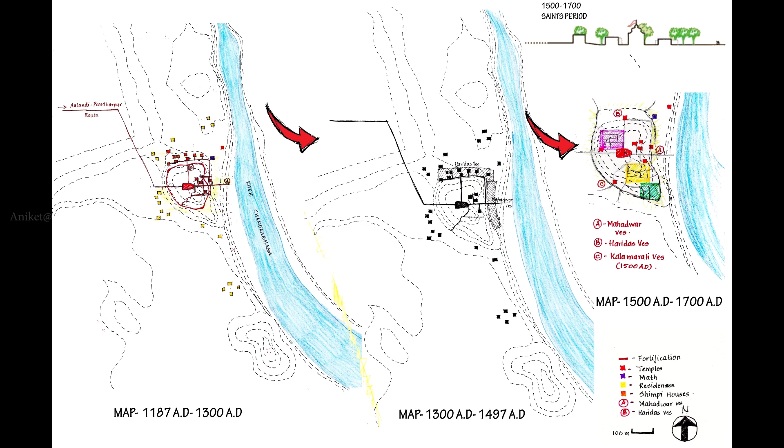Pandharpur and Vitthal existed in myths. Earliest mention of Pandharpur is found in Skanda Purana and Padma Purana. Skanda Purana are the verses and dialogue between Lord Shiva and Parvati, whereas Padma Purana mentions the story of Pundalik, who was responsible for getting Vitthal in Pandharpur. From many literature sources referred, it is evident that Vitthal temple existed in the 6th century, according to Purana.

This town was also called Dindirvana or Lohodanda Kshetra. On further exploration of maps from the 12th century and actually visiting Pandharpur to experience the ambience, it led to the conclusion that the occupation of Pandharpur is temple based.

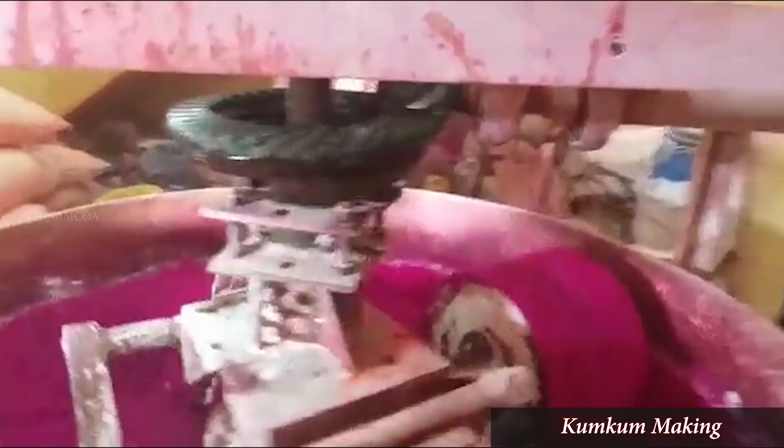Many important occupations have started growing around the vicinity of the temple, where activities like stonecraft, making items needed for puja, bangle making, and many more gave names to the lanes according to the occupation it consists, for example Murtikar Lane, Bhande Galli, Kasar Galli, etc.

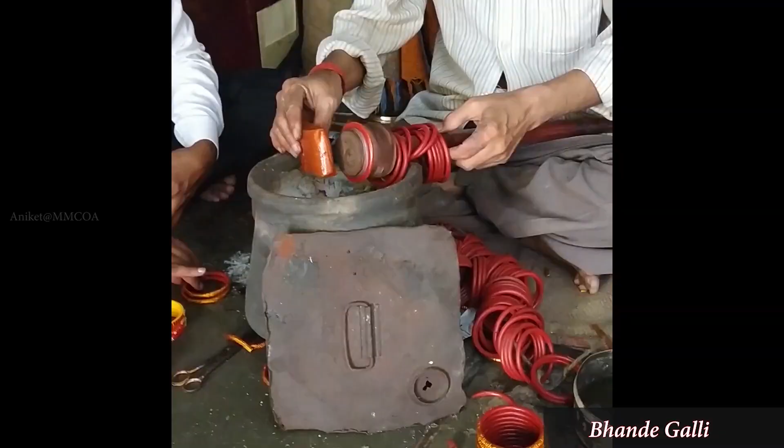Pandharpur was also studied by taking into consideration other pilgrimage places of India like Varanasi and Brajabhumi. This study led to the conclusion that the arts and crafts of Varanasi and Braj still exist in the minds of people, and these cities are studied by many different authors, whereas the study regarding the arts and craft of Pandharpur is still missing in terms of an architect's point of view and further development.

Pandharpur is also famous for its Guru Shishya tradition of the Warkari sect. In the 13th century and even after that, people generally visited this town to meet various santas, seek their blessings, and learn the importance of Vitthal Bhakti. This tradition stopped after the era of the santas.

To conserve such diminishing traditions like the hidden material skills, performing various art forms found in Wari, and understanding mythology becomes the main USP of this project, as these three factors are never pursued by people and many are unaware of them, as their journey is limited to visiting the Vitthal temple.

Hence, the proposal of a Traditional Skill Development Institute, which will practice the Gurukul system of education, seems important to conserve the tradition. As concluded from the study of religious towns of Varanasi and Brajabhumi, many small and large-scale Gurukuls are established in such places which teach the young generation the importance of Vedas. Such enhancement of traditional activities makes the religious town sustained.

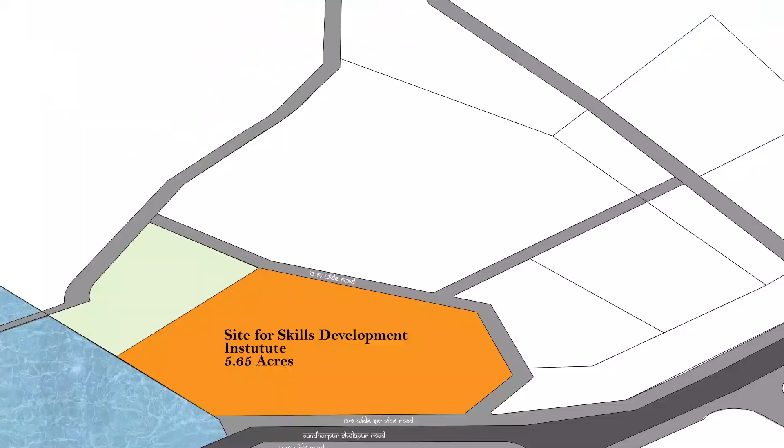Both secondary and primary case studies, as well as the town study of Pandharpur, helped me arrive at my design program and the proposal of a Traditional Skill Development Institute, which will mainly concentrate on teaching various traditional material skills, various Warkari performing art forms, and experiencing the mythology of Pandharpur town.

The selected site for the project demonstration lies within the municipal boundary of Pandharpur town. The site is under the Pandharpur Nagar Parishad, which is purposely reserved for activities related to Warkari and for Warkari education. The location of the site is exactly on the opposite side of the river bank from the Vitthal Rukmini temple, at a 20-minute walking distance from the temple. So as we see from the map, this is the location of the site.

The area of this entire land is 65 acres and it is sandwiched by two bridges: the old bridge and the new Chandrabhaga bridge, which further connects to the Pandharpur-Solapur highway. The growth of this entire town is mainly enhanced because of the Vitthal temple, highlighted on this map. The entire development of the town is towards the Alandi-Pandharpur road and the Pandharpur-Solapur highway, hence there is huge scope of development on this 65 acres of land.

The 65 acres of land is well connected by different historic ghats of Pandharpur on the opposite bank of the river, for example the Krishnaji Ghat, Uddhava Ghat, Haridas Ghat, Kumbhar Ghat and Mahadwar Ghat. The site has direct access from the Mahadwar Ghat, highlighted by this pathway, which further connects to a pedestrian road and hits the site at this point.

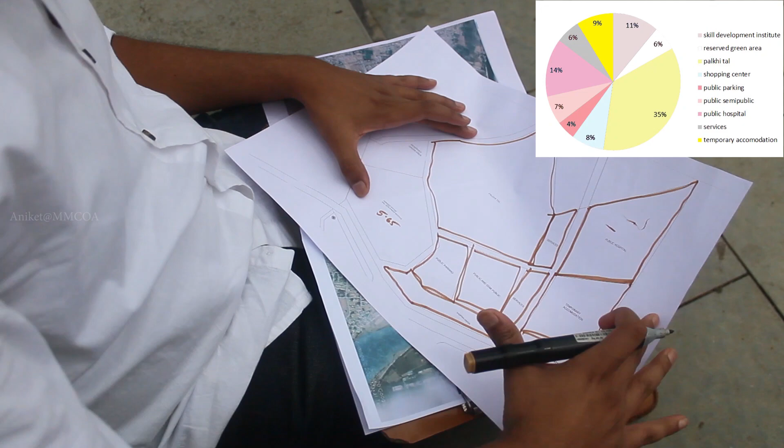I have chosen 5.65 acres out of the 65 acres of land for my development, and the area adjoining to the site is generally covered by lots of vegetation, so this is reserved as a green area. Some part of the site will be reserved for the ghat area, which will avoid the flooding of river Chandrabhaga during the rainy season.

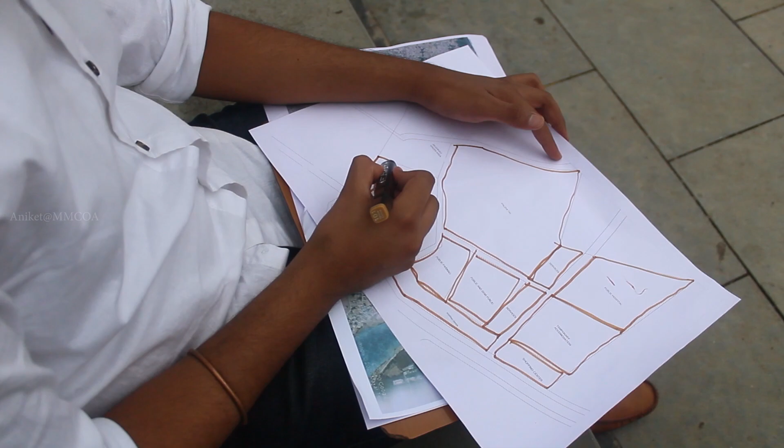To begin with the actual proposal, the essential requirements for this institute are the workshop areas, a performing art classroom for Warkari students, a vocational block which will consist of teaching and learning of various musical instruments found in Wari, a temple area which should be accessible to all visitors, an administration block, a common gathering space, residences for students and gurus, a goshala for cows, and an auditorium.

After trying out many different possibilities of zoning, I finally arrived at my zoning strategy. The placement of the temple and the administration block is planned, as these two spaces are the start and end point for any visitors. Hence, in order to express gratitude towards the old town and the historic temples around, a reference line is traced from the Pundalik temple.

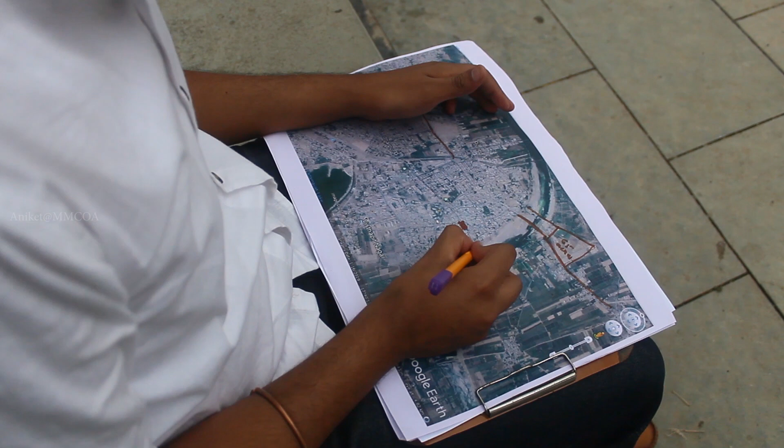This is the location of the Pundalik temple on the Google image. I have traced a reference line, or we can call it a view line, from the Pundalik temple, which hits the site at these two points.

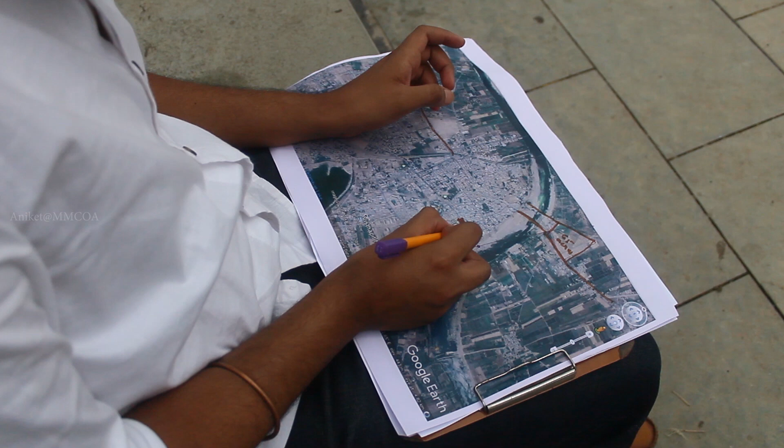As referred from many sources, it is also evident that the Vitthal temple existed on a hillock. This slope is evident as we walk from the Vitthal temple towards the Mahadwar Ghat, which further approaches the Pundalik temple and various samadhis of the Sants located on the riverbed. If I cut the section from the existing Vitthal temple to the Mahadwar Ghat, we can observe the slope towards the Pundalik temple. According to many different sources referred, the level of the feet of the Vitthal idol matches the level of the Shikhara of the Pundalik temple.

Hence, I have traced the reference line from this Pundalik temple towards our site. This is the reference line which I have traced from the Pundalik temple. The newly designed structure on this site will originate according to this reference line and the point of intersection of this line with another reference line.

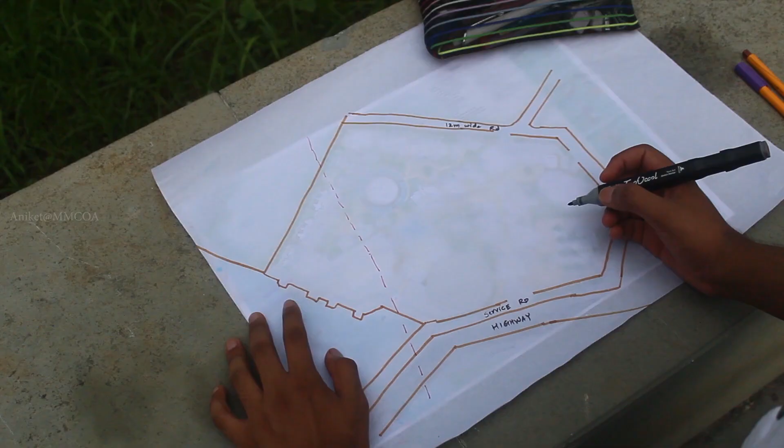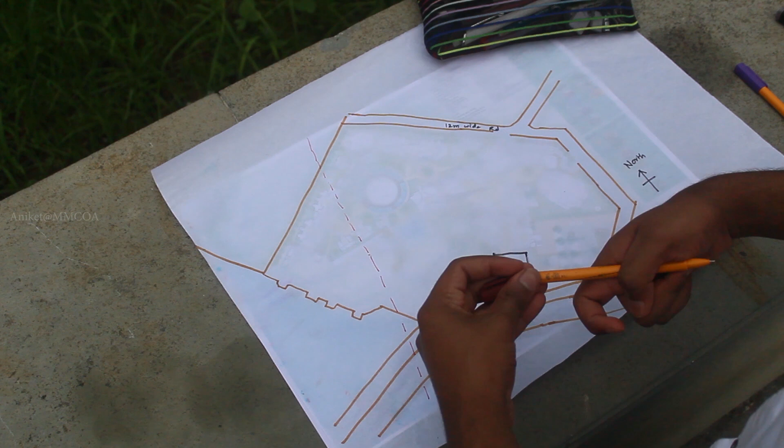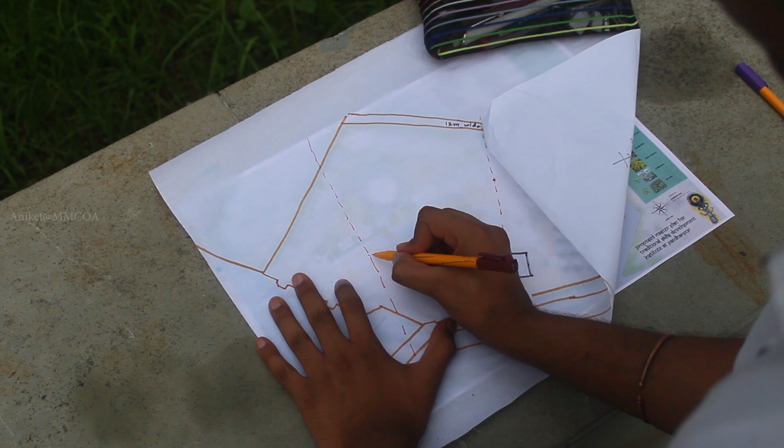To trace another reference point, the admin block is zoned at the entrance, and I have taken the admin block exactly parallel to this service road. So this admin block is generally zoned at the entrance. As I have mentioned earlier, the campus should support the mythology of Pandharpur. Now, when I trace a reference line from the center of the admin block and extend this line from this point, I get the exact location of the temple.

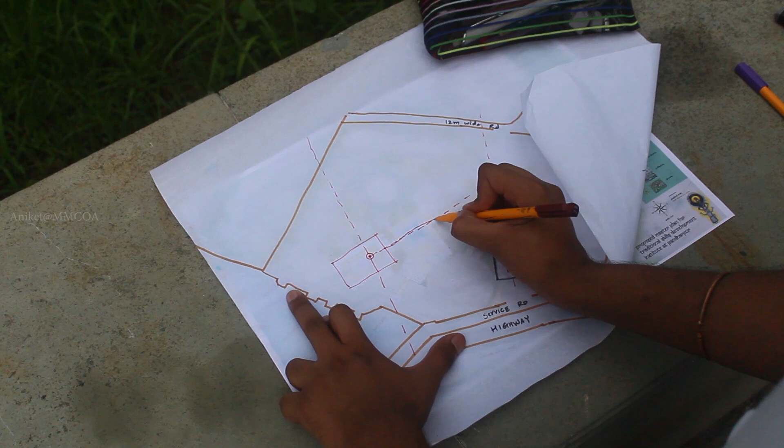Thus, I fix the placement of the temple block and the administration block with a small courtyard, and the remaining building blocks will be zoned along this pathway, which will form an interesting connecting spine to all the different building blocks.

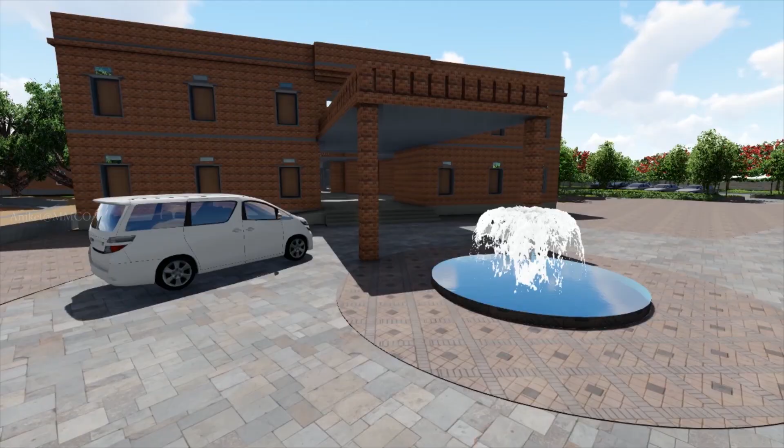The myth of Jai and Vijay, who are painted on almost every house in Pandharpur, are the guardians of Lord Vitthal. It is believed that Vitthal stays in the house where Jai Vijay are painted. The strange thing about these characters is that they are also painted on the walls of the mosque, indicating the importance of these two characters. This quality of guardian is brought into the campus within the admin block by creating a restricted entry for people.

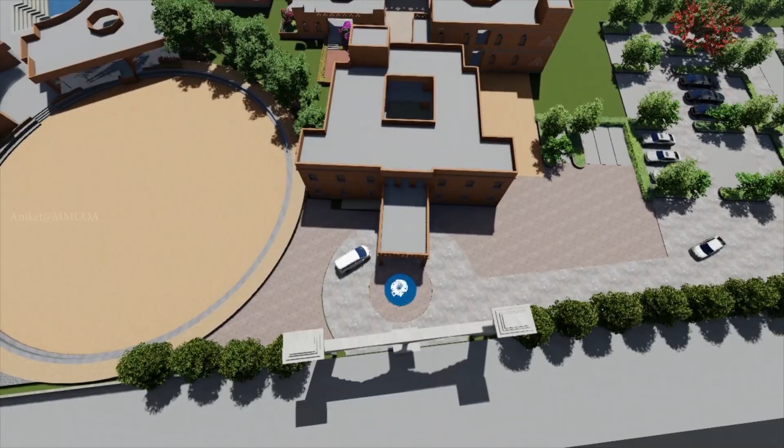This restriction is mainly brought about by the Tourist Information Center and the workshop enrollment space within the building. I have provided 10% of parking space for visitors inside this campus as well as for teachers. During the peak period, the parking requirement will be fulfilled as I have provided 2.3 acres of parking in my master layout. This is the parking space allocated for the teachers and the visitors.

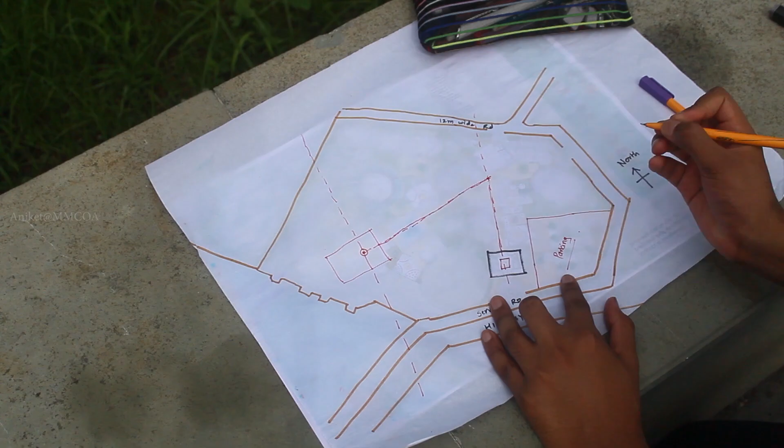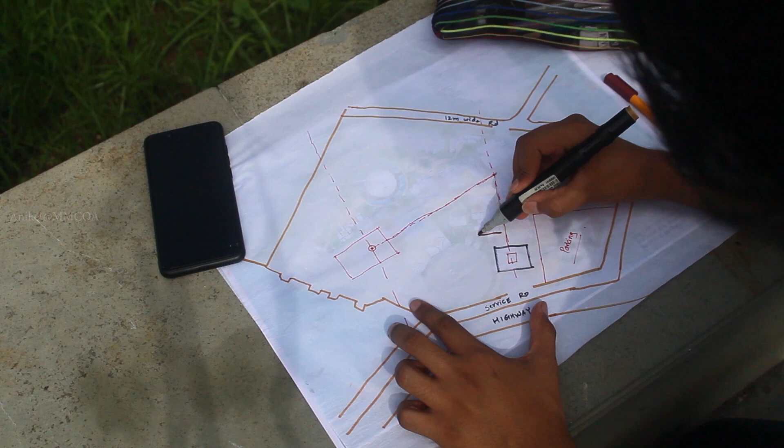Taking a cue from the old streets of Pandharpur, linear low-rise workshop spaces are designed on the site, creating an organic layout of built form and landscape spaces. This creates individual space within each part of the layout. The workshop spaces and the display areas are zoned along this reference line and are basically designed according to the function.

The position of the teacher, so this circle will be the space requirement needed for the teacher to work, and the position of students observing a teacher doing some craft. So this forms a module like a quarter circle.

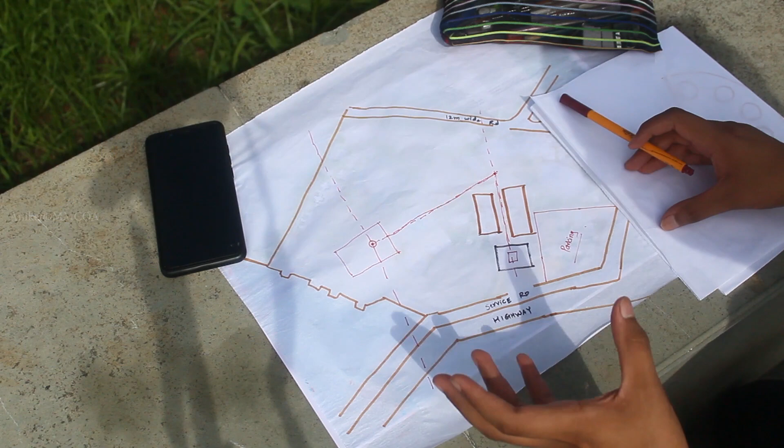This module will remain the same for all the workshop modules like stonecraft, bangle making, copper dressing, traditional building construction workshop, etc. Thus the quarter circle module form is repeated by introducing some open spaces and semi-open spaces for public workshop along this reference line on both sides of the line.

The quarter circle module is repeated in this fashion, which forms a cluster of classrooms. So these three will be the classrooms and this will be the open deck for shopping, and the classrooms will be combinedly attached to a staircase.

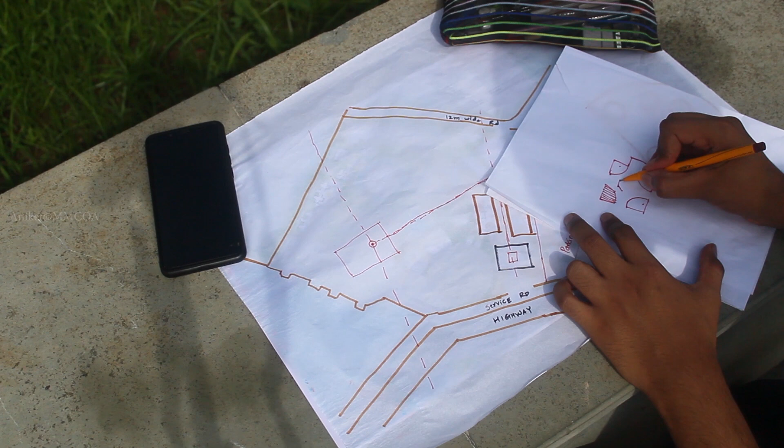An octagonal courtyard will be inserted in between the cluster of classrooms, which forms the space for public workshop. Some sector modules are transformed into display areas which also project outwards like small shopping decks. Thus, these workshop spaces are compared with the Vitthal Bhakti, as lots of hard work is involved in learning these activities. This arrangement gives the look of a traditional bazaar to a street.

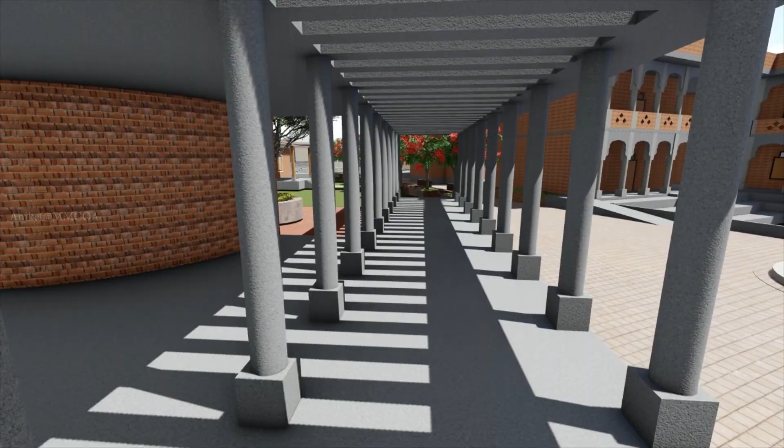The organic connecting pathway to all buildings finally gets merged into a node, which creates a big plaza with the block of performing arts, where a person will get to know about the games, various performing art forms in Wari, and the Gurukul system of education followed in Indian culture.

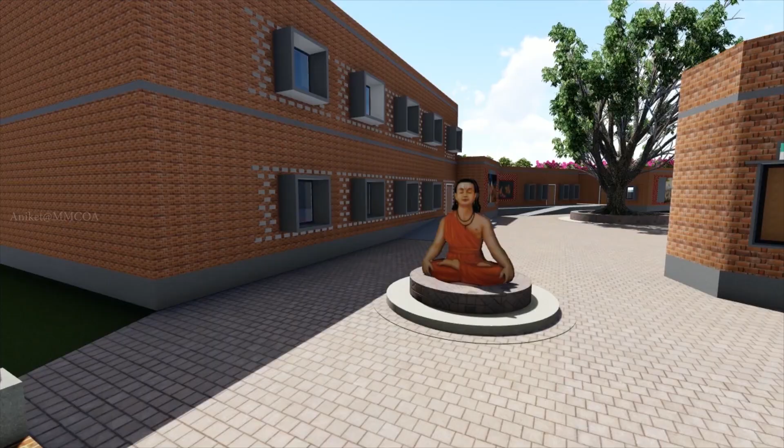Adjoining this block, a zone is created where other blocks like kitchen, dining, cafe, godown, and an auditorium are zoned. This creates an interesting open space in between, which I call the Dnyaneshwar Plaza, wherein the building facade will depict the stories of Dnyaneshwar Mauli and his Bhakti.

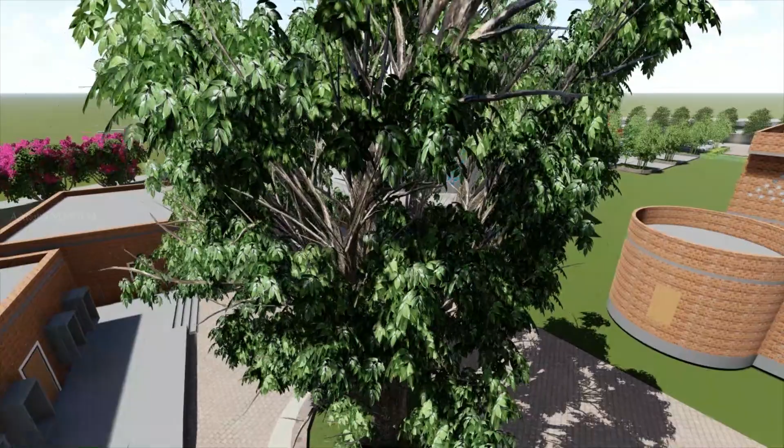The central tree is a node which connects the architectural spaces. It is also a gathering point and a sitting area.

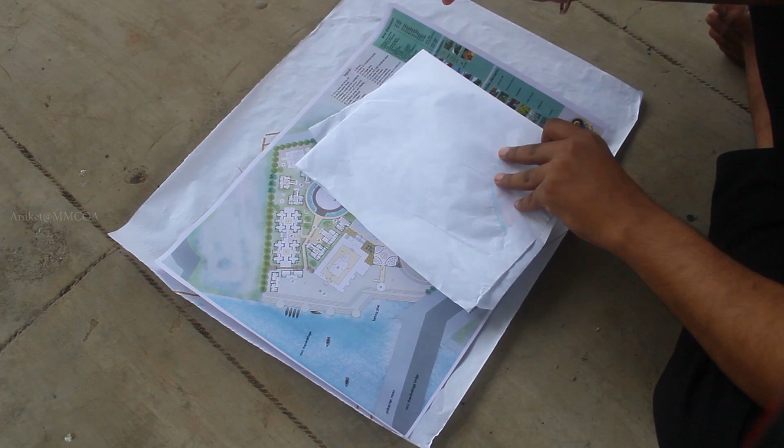From the kitchen and dining area which is zoned near the Dnyaneshwar Plaza, one comes to know about the Pangat system which is followed while having lunch or dinner. The internal spaces in the kitchen, dining area, and the cafe area are so planned that...

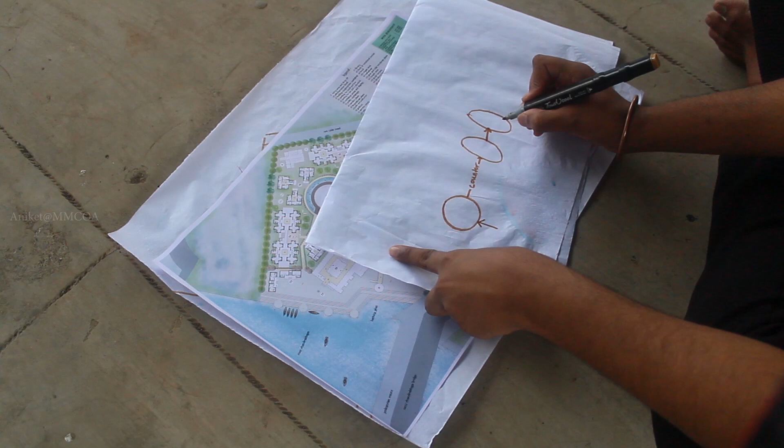The entry of the dining hall will be from the Dnyaneshwar Plaza. The dining hall will be further connected to a counter. The counter will be connected to the kitchen area. The kitchen area will be finally connected to the loading and unloading platform. And from the dining area, one will have direct access to the toilet and washing area.

So the zone which is formed by the kitchen, dining area, cafe, godown and auditorium will be so planned that the service entry is from the 12-meter wide road which approaches the site.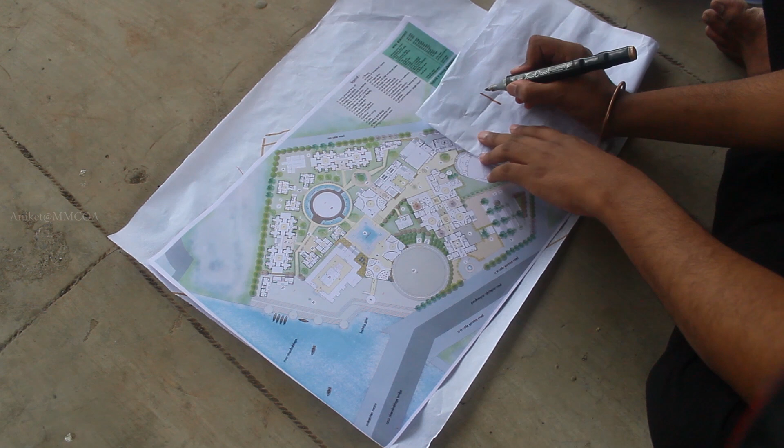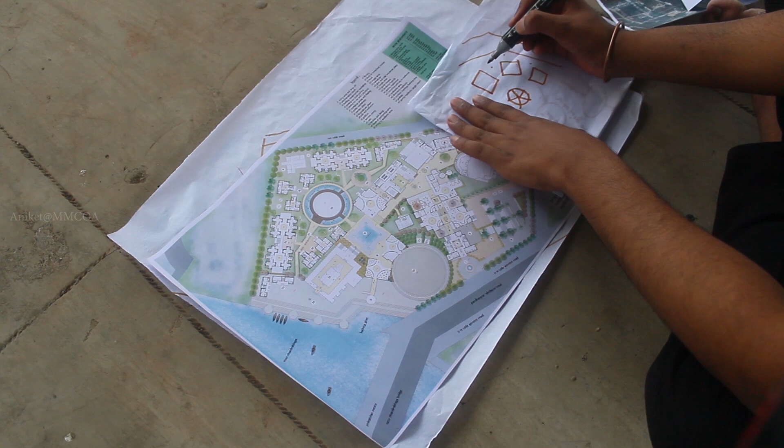If you see in the sketch, this is the kitchen and dining area. This will be the cafe block and this will be the godown. And this will be the park area where the tree will be placed. The 12-meter wide road will give direct service entry to all these three factors, combined with a loading and unloading platform.

The auditorium area is provided to bring the mythology of Pandharpur in front of people, where some short films, performances, etc. will be shown to people. This space will also be used during festivals like Ekadashi, etc., for gathering, performing dance forms, Kirtan, Bharud, etc.

While walking through the site, you will also observe the two sculptures of Sant Dnyaneshwar and Sant Namdev along this route. These sculptures will be constructed using various materials like stone, copper, etc. They will also bring about the craftsmanship and hard work involved in material skills.

The performing block and the vocational block are separated by the Sant Tukaram Academic Plaza, and the two blocks are connected by a bridge on the upper floor.

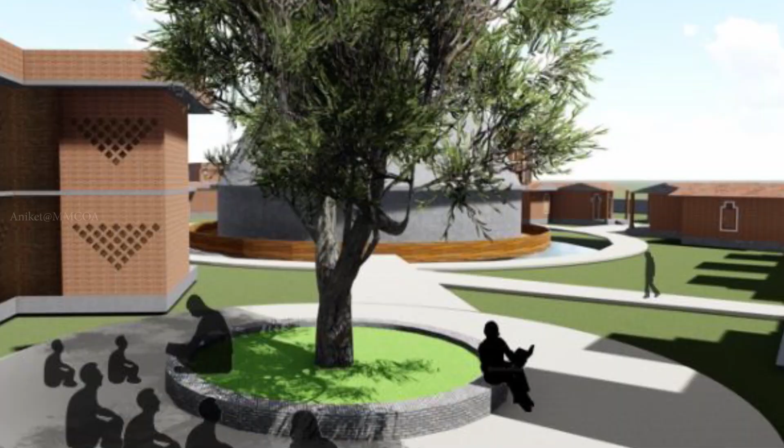This separation is mainly to avoid overlaps of activities and to avoid disturbances during regular classes. This plaza further connects to a park area where one sees the outdoor teaching learning activity, which is followed by any traditional Gurukul. The connecting pathway further leads to the Kund and the temple area.

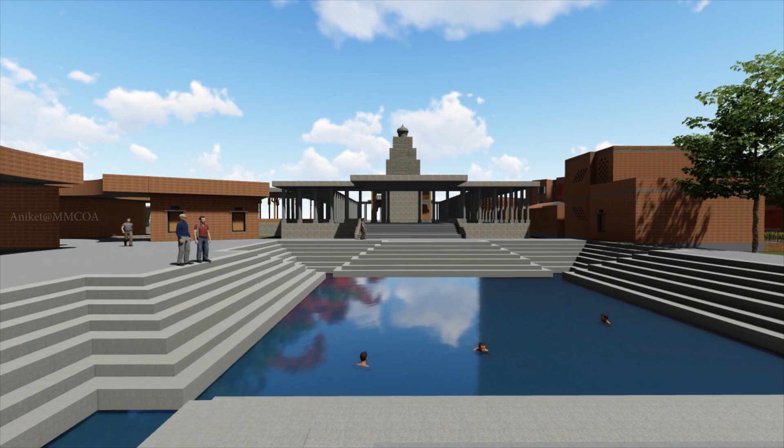The Kund serves as a refreshment area before entering the temple, which is also connected to a gathering space or meditation hall. This water body is also used as passive cooling for the nearby buildings.

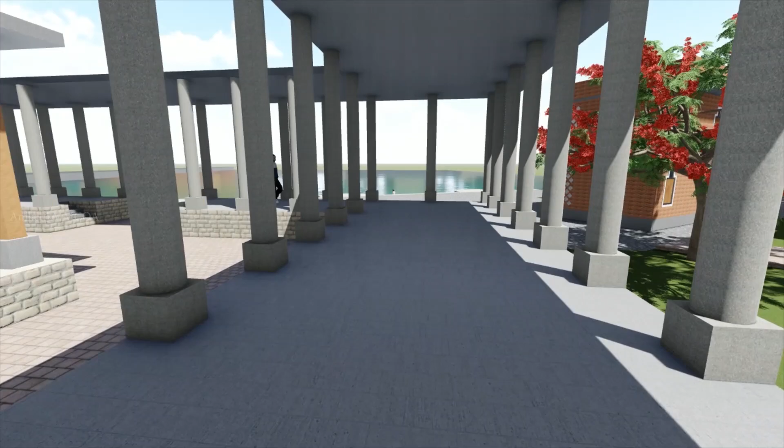The temple design is inspired from a Maratha style temple with a Garbhagruha, Antarala and Sabha Mandap for Kirtan performances. There is a 3-meter wide covered passage with RCC columns which follows the Khana system in Maratha architecture. They are placed at 1.8 meter center to center, comprising an exhibition space during any event.

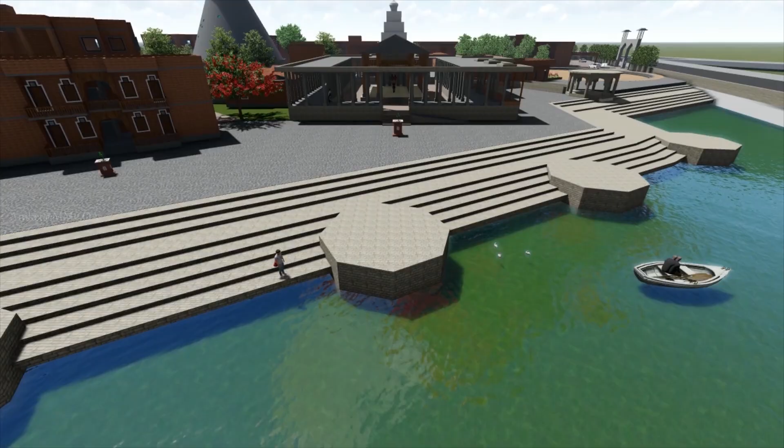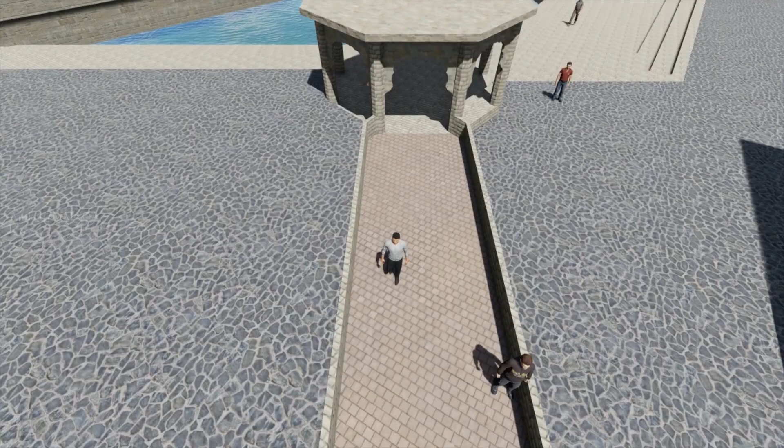The access to the temple, that is meeting the god, is designed in two ways. First, the direct access from the Kund area. The second entry is from the courtyards and semi-open spaces of the vocational block, which goes to the Mahadwar, the gateway to enter the river Chandrabhaga. So the person will bathe in the river, visit Tulsi Vrindavan Plaza, and then enter the temple.

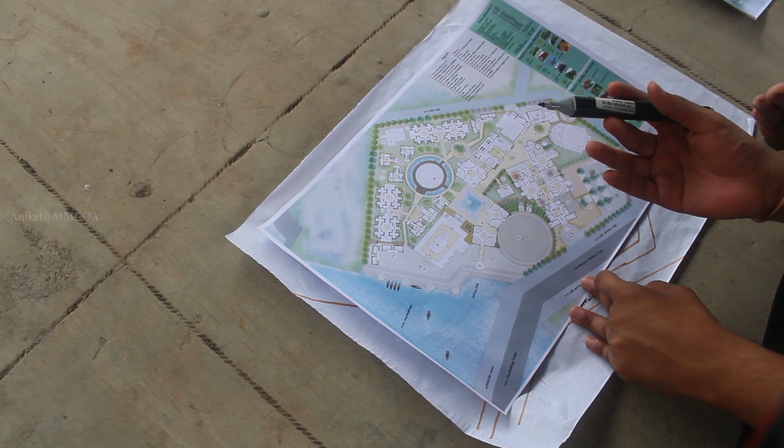The Ringan ground is attached to the vocational block. Also the building lines of the vocational block define the open space in the campus. This ground will be used by students for outdoor performing arts which need lots of space, and can accommodate more than 800 people at a time while performing the Ringan. This will also avoid overcrowding in the temple area during peak hours.

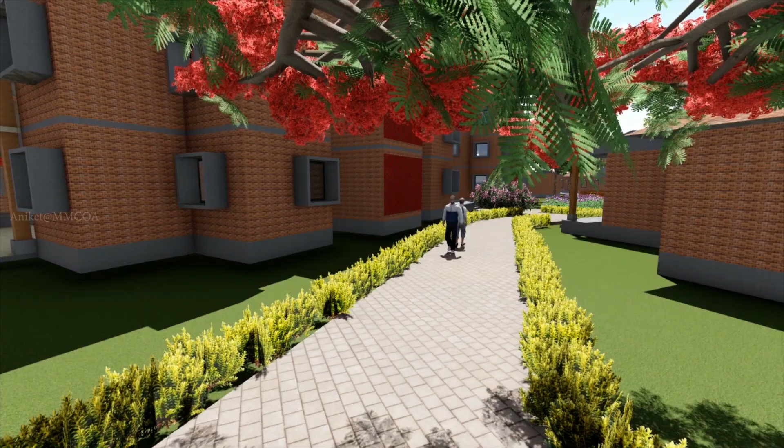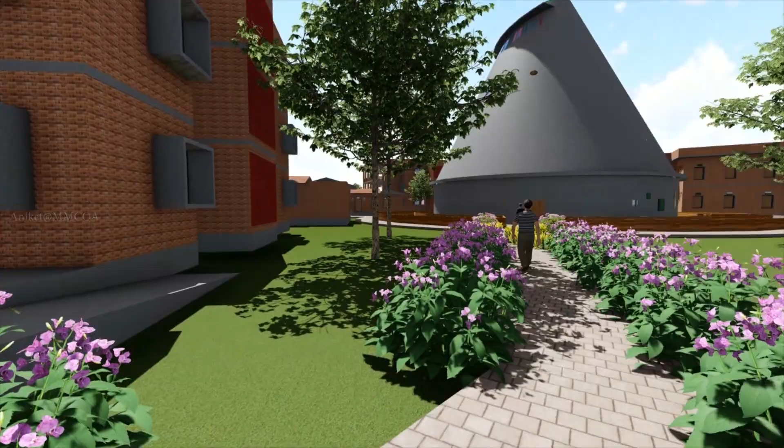Due to this zoning strategy, the academic spaces and the residential part got well segregated in terms of privacy and circulation. From the Ghat area, a connecting pathway connects the residences of students and teachers, where a person gets to see the simple lifestyle of Warkari people.

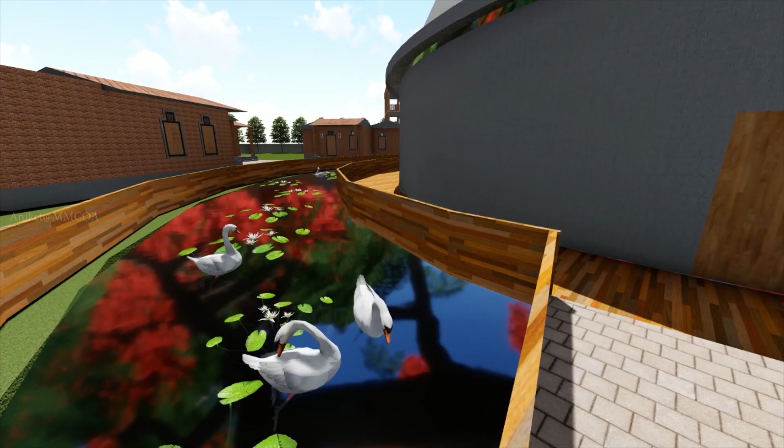This route finally merges with the meditation or gathering hall. The form of this structure is inspired from the crown of Lord Vitthal. Similar such qualities of God are brought in front by this structure.

The quality of peacefulness is achieved by making this hall underground, which will also isolate a person from the surrounding area. The quality of energy is achieved by the strong circular geometry and the height of the structure. The quality of coolness is achieved as the underground temperature provides a cool environment.

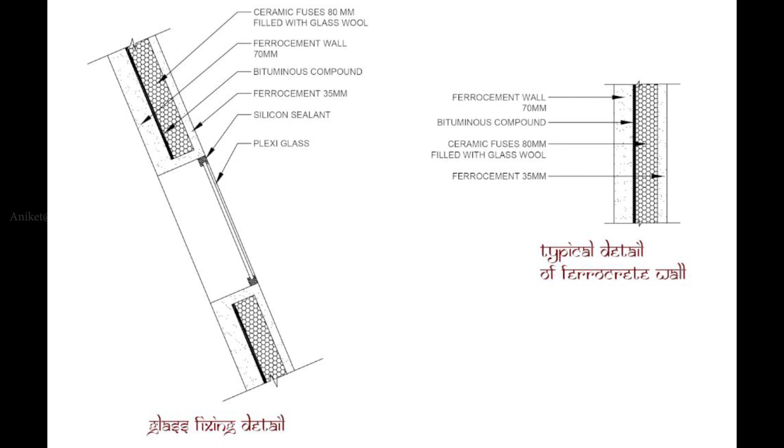The construction technology used for this structure is ferrocement construction with required reinforcement. This cement gives a soft texture to the building, achieving the quality of softness. The structure is kept porous by making small openings and a big skylight with vertical louvers at the top, which brings lots of natural light inside, giving a blessed feeling to users while meditating or praying.

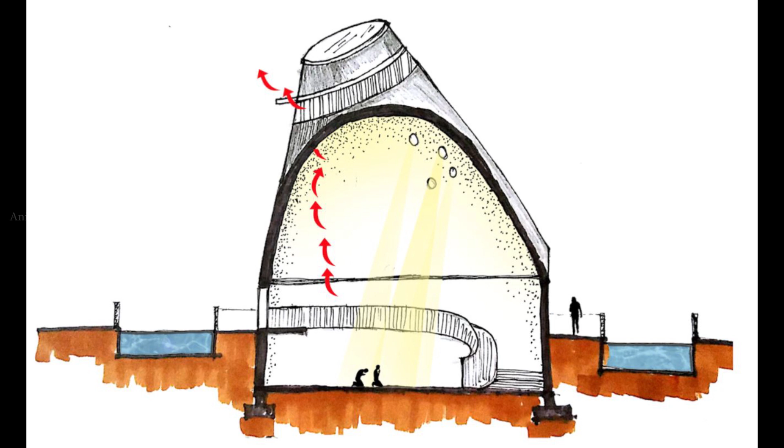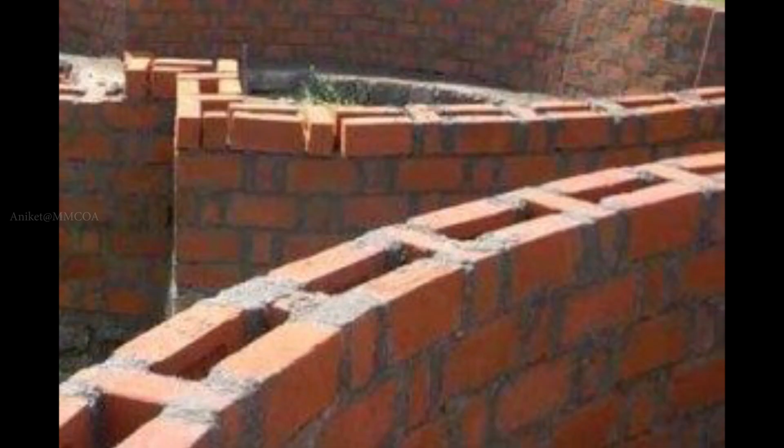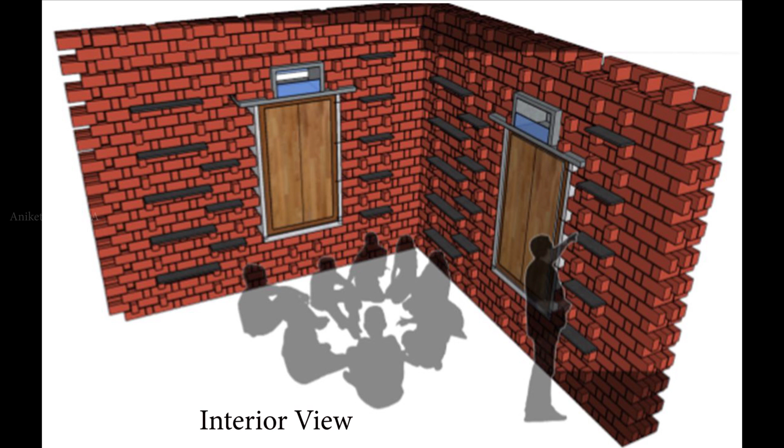The construction material and technology used for the academic block and workshop spaces is fly ash brick with the rat trap bond for insulation. Being low-rise buildings, they are load-bearing structures with window designs inspired by Maratha architecture, and the ventilator openings will be precast. The outer projecting bricks are used as an elevational feature, and the inner brick projections are converted to shelves for display of articles in case of workshops.

The most interesting thing about this design is that a person completes one pradakshina unknowingly and reaches again the same point, that is the academic plaza, after meeting and experiencing the god.

Thus, the visitor gets the entire glimpse of Pandharpur town and Warkari tradition and belief, understanding Lord Vitthala Pandharpur in a true sense, as this walking journey and finally meeting the god is not an easy task, but still it is very enjoyable because of all these performing arts observed in Wari.

This campus design proposal will not only enhance the teaching learning of traditional activities but also conserve the culture of Pandharpur town and Wari. This designed campus will also be reused as a dharmashala for Warkari accommodation during Wari.